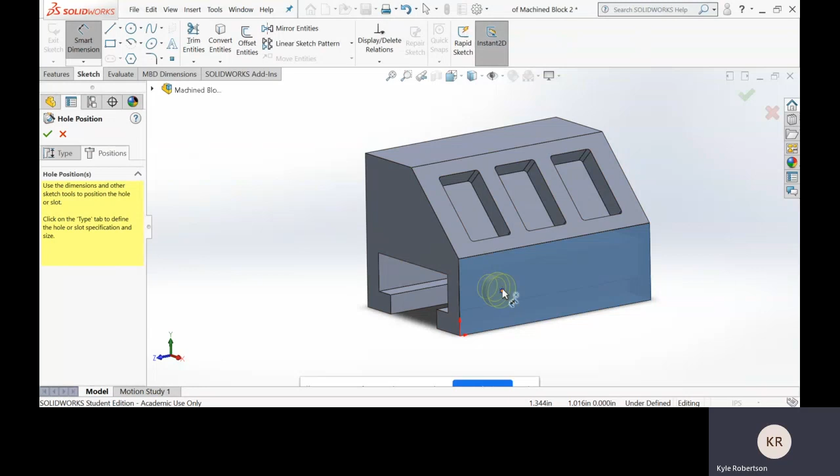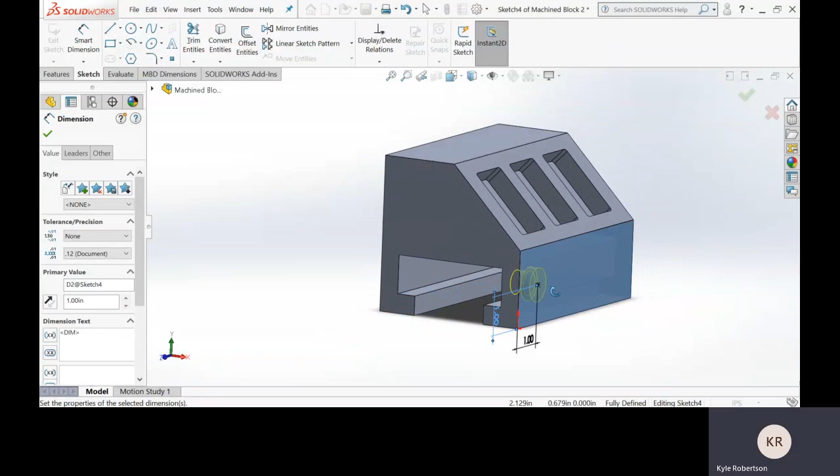So on here we can smart dimension the position of this first one. So we'll select the center of the hole or the point we added and the edge of the part, and we'll set that to 1 inch. And then we'll need to position it vertically here. So we'll set the vertical position to 1 inch as well. And that gets it right where we want it. So you can see that goes through just a little bit. They did that on purpose just so it cuts all the way through.

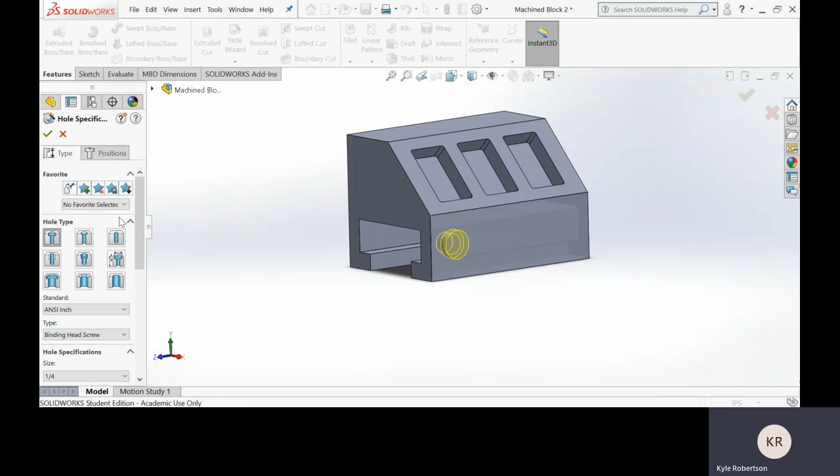And we'll go ahead and click the check mark here. And we're happy with our hole position. So we'll click the check mark again and it'll create our hole. You can see that appear on the design tree. It's a feature on our design tree now. And that's just like anything else. You could go back and edit this, change any of the properties of the hole, change the position if you wanted on the position tab again. A lot of people forget about this. It's easy to forget. There's a tab here to set the position of the hole or holes. So we've got that one.

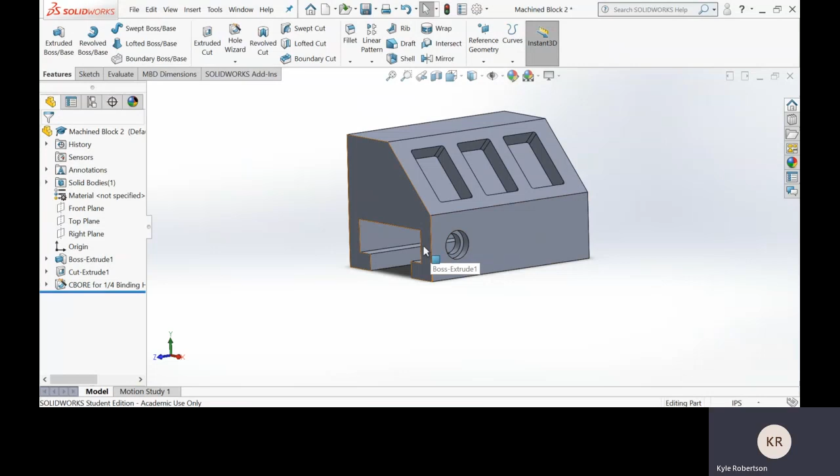So now that we've done that, if you go to the next page, which is 8.6, this is where we're going to create a pattern for it down the side. So we will stay on the features toolbar up here. We'll go to linear pattern. For the direction, we want to move along this edge. We'll select that. Distance apart. The spacing here should be 2 inches. We want 3 of them.

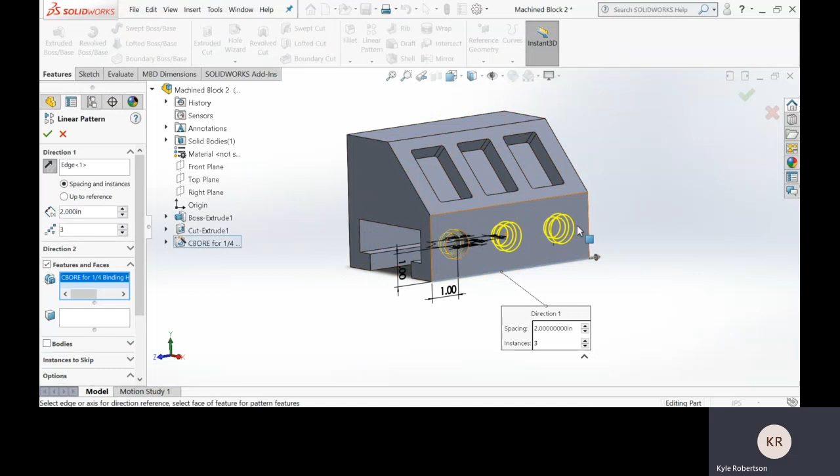And then we need to select the feature. So we'll select the features box. And we'll drop our design tree down and select the counter bore. And you can see it pattern it correctly there. That's how we want it. And so we'll click the check mark. So we've got our 3 holes down this side. We need 3 matching holes down the other side. And so what we need is a plane down the center of our part here to mirror that feature pattern across.

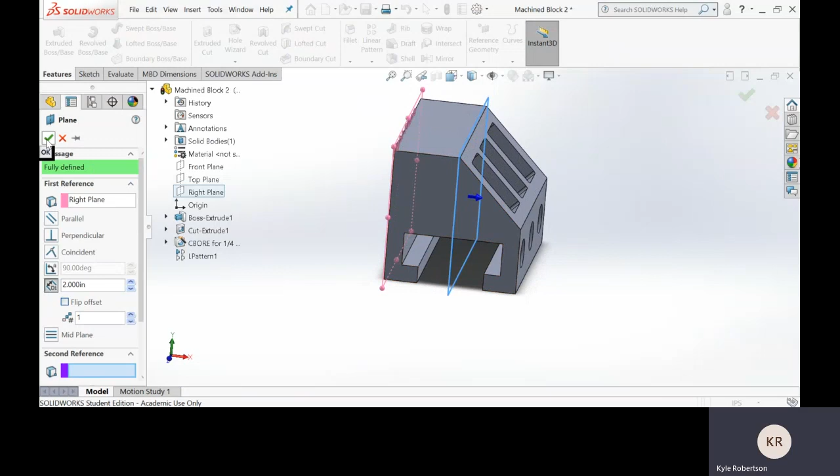Okay. So we know our part width here is 4 inches. So what I'm going to do is go to reference geometry like we've done before. We're going to create a new plane in the middle. So we'll select reference geometry and select plane. Okay, now I believe the right plane, yep, the right plane's on that edge there. So we'll select the right plane as our first reference. And we want our new plane to be 2 inches off the right plane. So we'll enter in 2 over here for the offset distance. I don't need to reverse it because it went the right way, and now we have a plane in the middle of our part. So I'll click the checkbox. That's what we want. You can see our plane there.

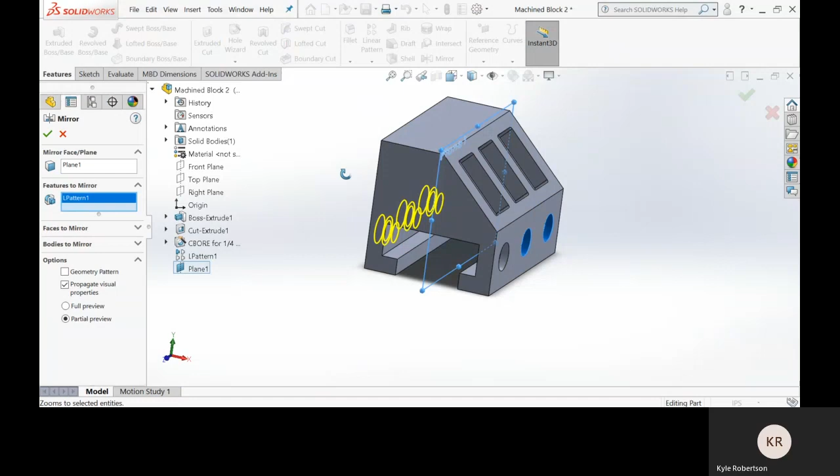And then we're simply going to select mirror on the features toolbar. Okay, so we'll come over here, select mirror. Face or plane, it's going to be the new plane we just created. You can select it on the screen or on the design tree if you want to drop it down here. You can see plane 1. And then features to mirror. I'm not going to select the counter bore. I'm going to select the entire pattern of the counter bore so that all 3 get mirrored. You can see that appear over here, and we'll click the check mark, and now we have our 3 holes on both sides. Okay, so that gets us through page 8.7.

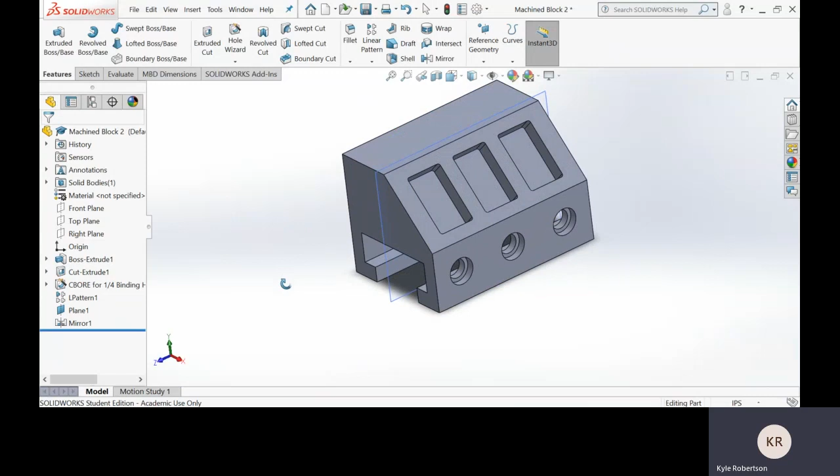And then the next step on page 8.8 is to create 4 holes on the top. I'm going to skip that part. That should be very straightforward. Actually, don't use Hole Wizard. Do it the standard way of making 4 holes. Make sure you use horizontal relations and vertical relations to define all those and lock them into a rectangular pattern with each other. The less dimensions you use and the more relations, the easier it's going to be to make new configurations down the line. You'll see that in the next couple of videos, why that makes it so much easier.

But if you can use the couple simple dimensions they have on page 8.8 to make that whole pattern, and then use relations to define the rest, modifying it is going to be way easier. You'll have way less things to change when we get further on in this model.

So we're going to go to the next video now. This is it for Hole Wizard. The next video is going to show you how to make your first configuration. That's going to be a section view configuration.